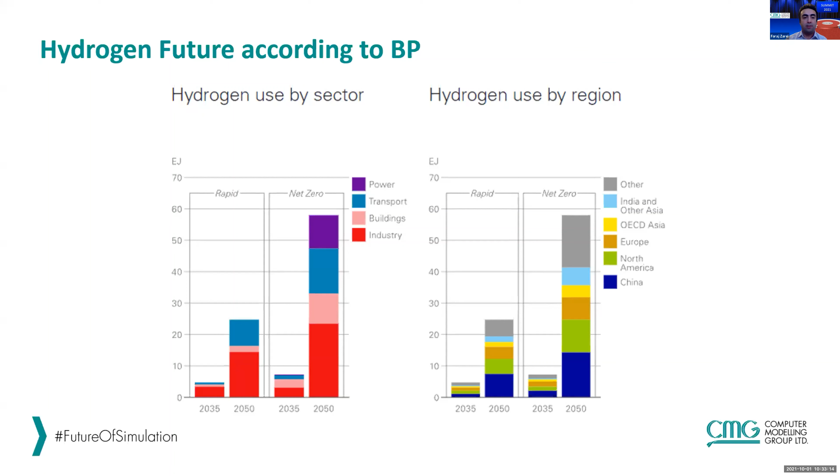So all of us are very familiar with the concept of gas storage. We have years of experience in terms of storing CO2 and methane, specifically in the underground environments. It's widely accepted that for any sort of large-scale, long-term storage, the only viable solution is underground storage. The four usual candidates are aquifers, oil deposits, gas deposits, and salt caverns.

A recent paper from Tarkowski gives a nice overview of the positives and, if you like, issues with each environment. While salt caverns are usually the least problematic, the big downside is that their volume size is quite restrictive, and the caprock can be quite delicate in salt caverns.

And the aquifers are not really reliable containers because the tightness of the caprock is usually much less compared to the usual environments when we have oil and gas deposits. So most of the time the only viable solutions are oil and gas deposits.

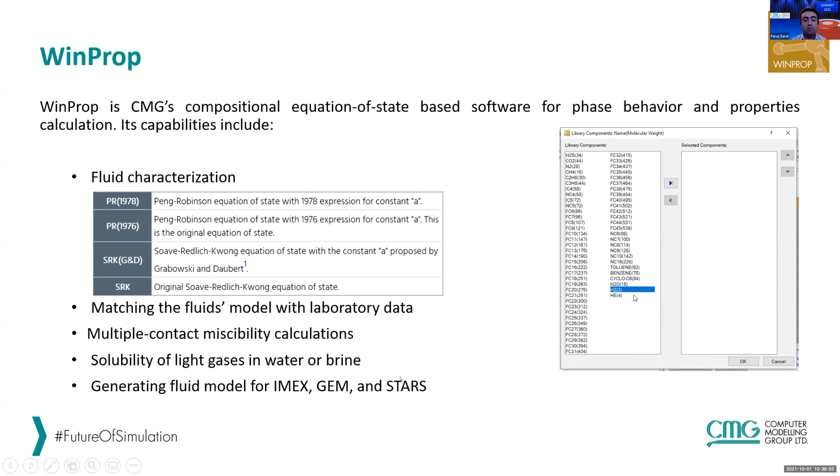Once you have the equation of state created in WinProp, if you have any lab data, any mixture, any regression or anything that needs to be done, you can export the PVT into any of CMG's simulators. IMEX is black oil. It's not really designed for hydrogen storage. So we have the choice of GEM and STARS. GEM is the compositional simulator, and STARS is K-value based. I'll go into the details of the capabilities of these two simulators when it comes to hydrogen storage.

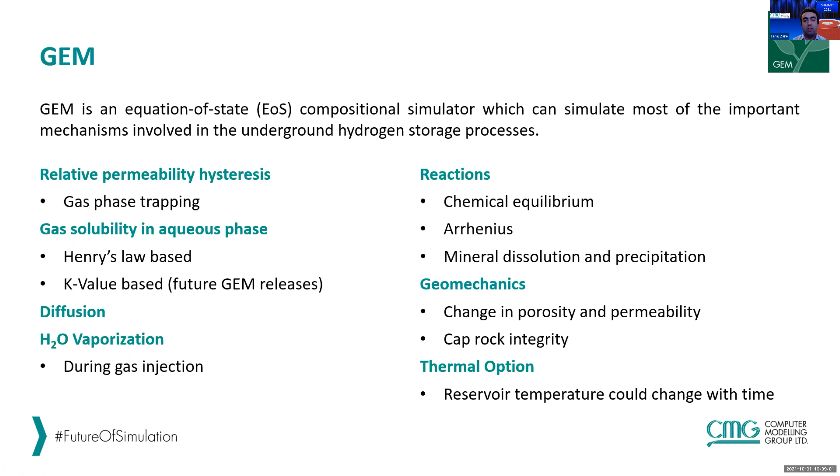So GEM, as I mentioned, is equation of state based, and it's been used for decades by the oil and gas industry. It has developed many advanced physics and complex process models that have accumulated over the years. For example, gas relative permeabilities, gas solubilities, diffusion, water vaporization. These are all processes that have been added to GEM over many decades, and they're all very much relevant for hydrogen storage as well. Over the next few slides, I'll give you a review of these capabilities in GEM and how they apply to hydrogen storage.

So we just had a detailed presentation on hysteresis. Just to remind everyone, hysteresis accounts for the effects of the changing wetting and non-wetting phase during the gas injection process. So WAG processes, when we alternate between gas and water, are a typical problem where hysteresis has major effects.

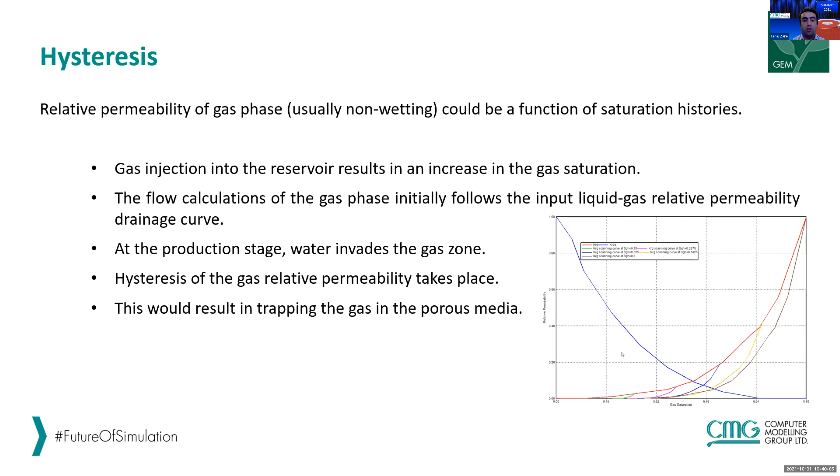Over the past couple of years, GEM has added quite advanced options in terms of modeling hysteresis. And because hydrogen storage is by nature a cyclic process, you inject hydrogen, you store it, and then you reproduce it, the same physics can also be applied to hydrogen storage as well.

Gas solubility. Hydrogen is not the most soluble gas, but usually it's accompanied by other more soluble gases like CO2 and methane. So it's very important that we take into account the solubility. GEM models solubility primarily with Henry's law. Henry's law basically dictates that the fugacity of gas in the water and the gas phase have to be the same.

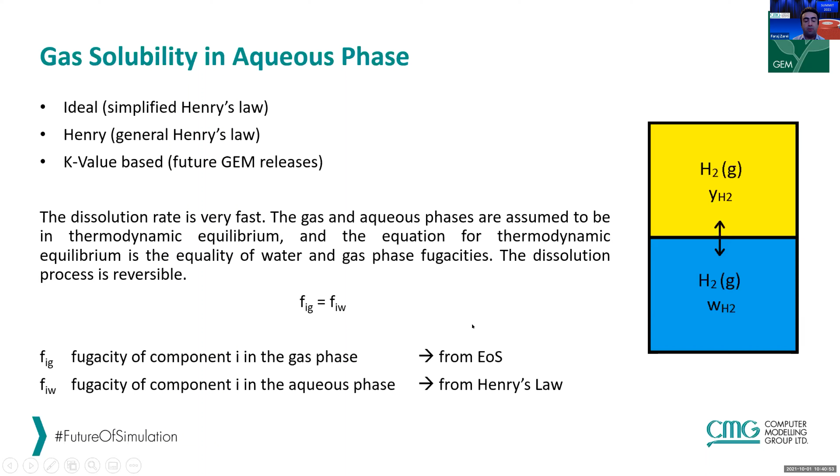So GEM internally calculates the fugacities. The fugacity of any gas comes directly from the equation of state, and GEM uses Henry's law to calculate the fugacity in the water phase. It's a rather simple equation. You have the Henry's constant for any pressure and temperature, which is measured in the lab environment, controlling the mole fraction of the gas in the water phase. This equation is always maintained, and that controls the amount of solubility.

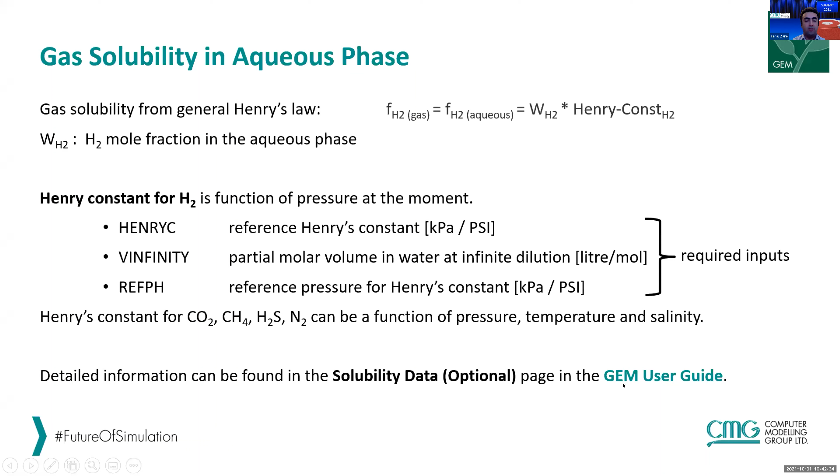As I mentioned, the Henry's constant is pressure and temperature dependent. Using these keywords, GEM can recalculate the Henry's constant entered for other pressures, so the solubility calculation is always valid for different pressure ranges within the reservoir. And for more soluble gases like CO2 and CH4, it has several built-in correlations that readjust Henry's constant not only for pressure, but also for temperature and salinity. If you need more information, you can refer to the GEM manual.

Other more standard properties, obviously the aqueous phase density. We have the simpler case of linear calculations, or Rowe-Chou, which is more advanced, taking into account pressure, salinity, and temperature when we are dealing with more complex physics, especially when features like geochemistry are involved. For viscosity, the Kestin correlation is usually the correlation of choice, because it maintains the consistency of the viscosity if you have pressure, temperature and salinity changes.

And for the gas phase density and viscosity, the density of the gas comes directly from the equation of state, most of the time Peng-Robinson, as I mentioned. And GEM also has the JST correlation, which maintains the gas viscosities in the simulation.

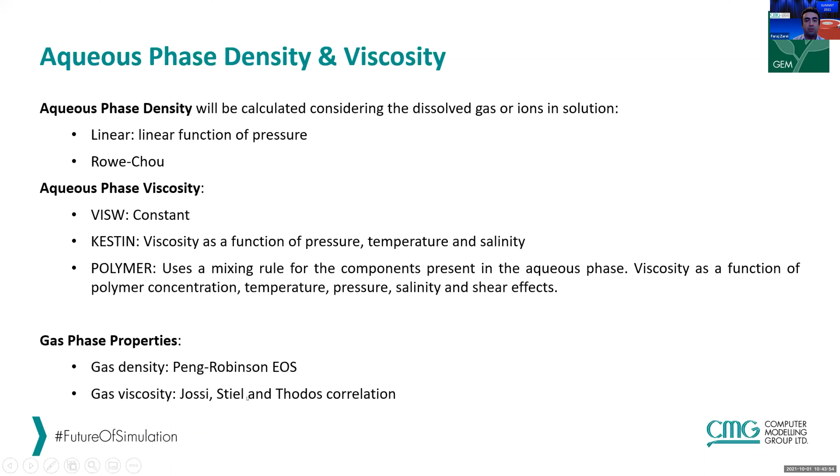Another major factor when we are doing injections, especially if the injection pressure and injection volumes are quite high, is the dry-out effect near the injectors. In such circumstances, the saturation around the injection well can dramatically drop, and that's controlled again by the fugacities of water in the water and gas phase. In this case, water has to enter into the equation of state, and GEM will take into account the drop in water saturation due to high rate injection near the injector wells.

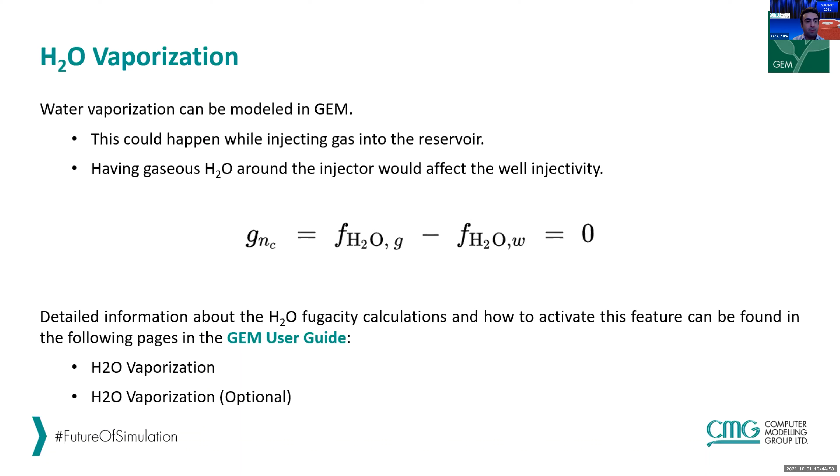In terms of reactions, we have two types of reactions in GEM. There are the chemical reactions, mostly aqueous reactions, things like CO2 dissociation. They are instantaneous, and they're controlled by a chemical equilibrium constant. The other type of reactions are Arrhenius reactions. These are rate dependent, and the speed of such reactions can be controlled by frequency factors and activation energy, so you can speed up or slow down such reactions to match any lab data if required.

An example of these Arrhenius reactions is methanation reactions, when you inject CO2 and hydrogen into the reservoir and you produce back methane. I'll have an example later on to show this one.

The other type of reactions are mineral reactions. These are much slower, and you have dissolution and precipitation involved with these reactions. Because we are dealing with solid components, they can change the porosity and permeability of the porous media, and that's obviously more dominant if you have geochemistry in the model, altering the properties of the rock.

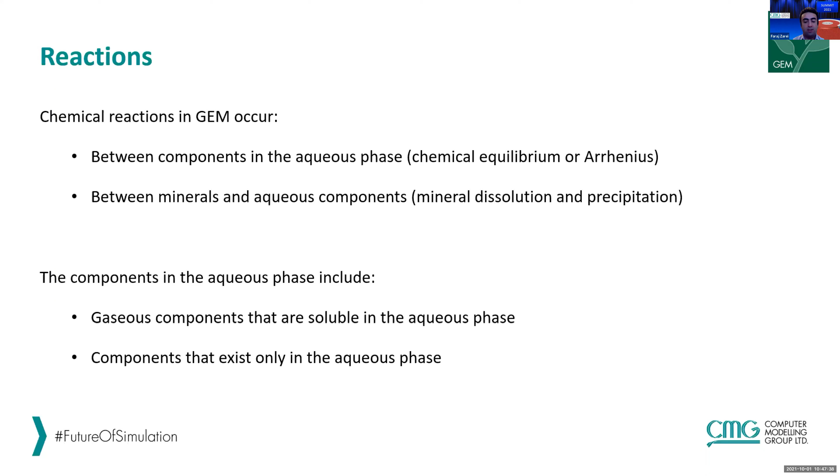The other major point is the thermal changes, especially for the hydrogen injection. If we are having large rates, the Joule-Thomson effects can create large temperature changes around the injectors, or if there are significant temperature differences between the injected fluid and the surrounding rock. The temperature effect has to be accounted for.

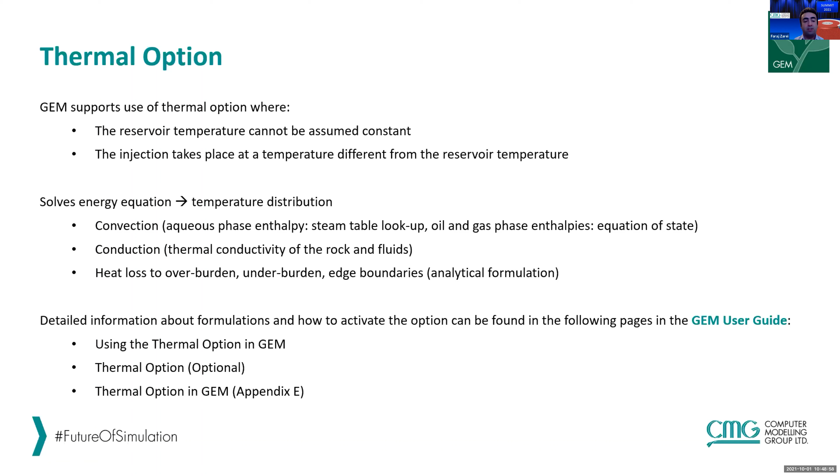So GEM solves the full energy equation, which has sections regarding convection, conduction, and heat loss to the boundary, overburden, underburden. All these processes and details can be captured in the full energy equation, and an accurate temperature prediction is possible using GEM.

Here I have a quick demo of how this works in reality. The scenario we're modeling is injecting a bit of CO2 for a couple of months as a cushion gas into an aquifer. You can see there's CO2 already in the reservoir; what I'm showing is the CO2 mole fraction in the water phase. So CO2 is in the reservoir and is dissolved in the water. We don't have any hydrogen and methane in the reservoir yet.

If we play this, in this plot the red dotted line is CO2 injected, and the CO2 that we produce is solid red. The blue is hydrogen injected, the solid blue is hydrogen produced, and the green is methane. As I mentioned, the methanation reaction converts the initial CO2 and hydrogen into methane. So as you inject hydrogen, there's methane being produced in the downhole environment, and you can see the hydrogen sits at the top of the structure.

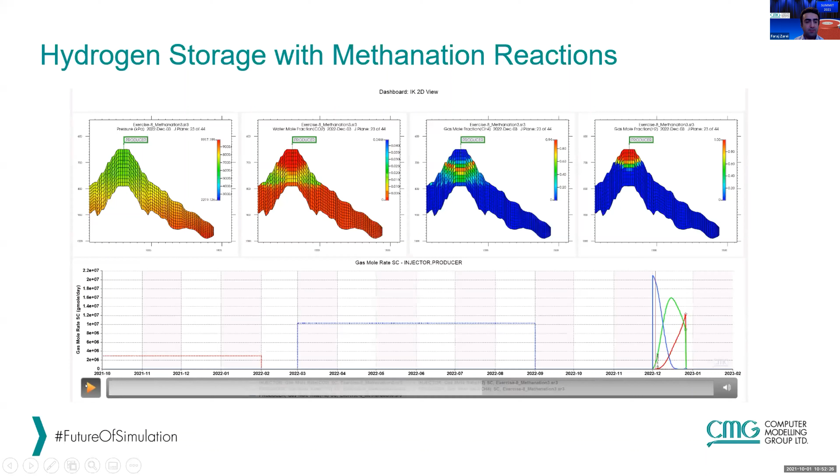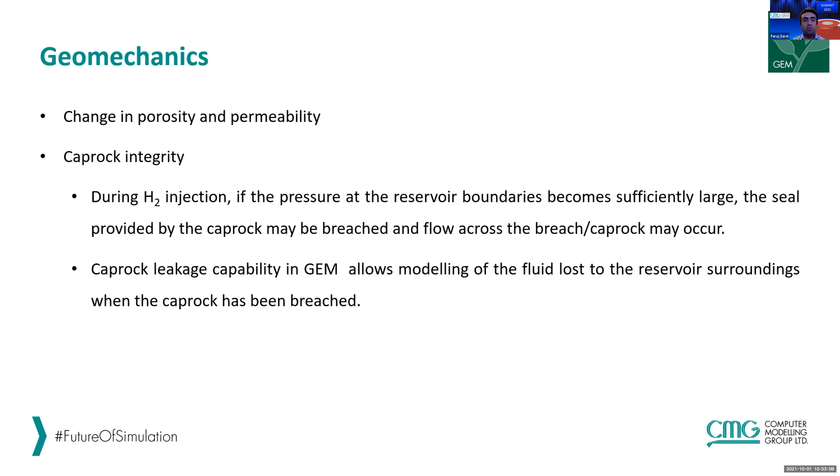Probably the most important factor in terms of hydrogen storage is the geomechanics. Hydrogen is an extremely small molecule, and it can escape from the caprock once there are the smallest cracks, pores, or permeability in the caprock. So having an accurate and reliable geomechanics model is paramount for any hydrogen storage success story. Full geomechanics is available in GEM.

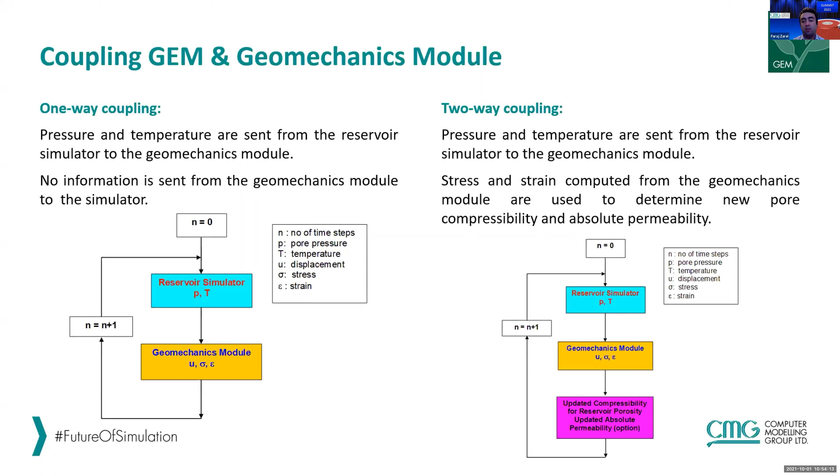You can do a simple one-way coupling, where the usual fluid flow runs in the background and sends information to the geomechanics module running on the side, so you can keep an eye on the geomechanics properties. Or, the more robust and accurate way is to actually engage these two simulators with each other. The flow simulator sends information into the geomechanics calculations, which calculate the strain, stress, and displacement. These parameters impact the porosity and permeability in the model, and eventually change the properties of the flow simulator.

So let's have a look at an example again. We have a gas storage example here which has two caprocks. If I start this animation, you can see we're only injecting in the bottom section of the lower reservoir. As we start injecting, the bottom hole pressure increases until there's the first crack, a permeable block in the bottom caprock.

Immediately after that, there's a gas escape from this smallest permeable block, which causes a pressure drop in the lower reservoir. You can see the BHP is dropping, and this is the amount of the gas that has actually escaped. The gas starts to accumulate on the top reservoir, and at some point even the top caprock also fails, and we have the gas escaping from both of the caprocks, which can be quite a costly failure.

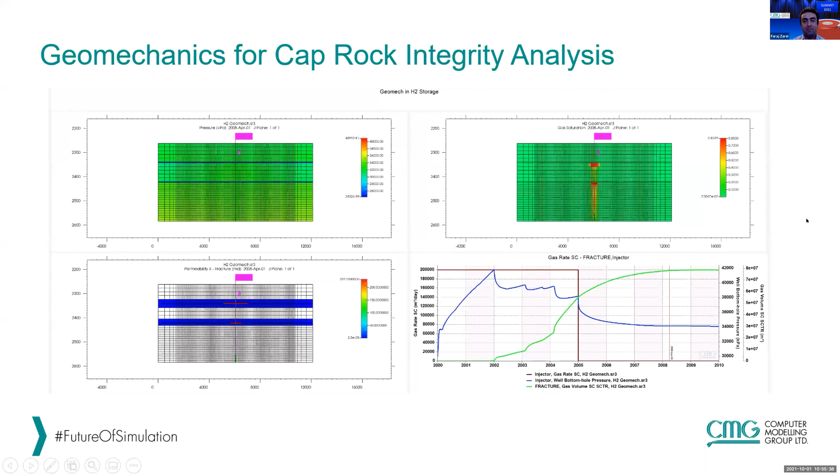So everything that I showed you so far was about GEM, but very similar capabilities are also in STARS. For those of you that are not familiar with STARS, it's another CMG simulator, which shares many of the same features. The big difference is that it's k-value based. So instead of putting the equation of state directly into the simulator, the tuned equation of state is used to create k-value tables, setting for STARS each component's amount in each phase at different pressures and temperatures.

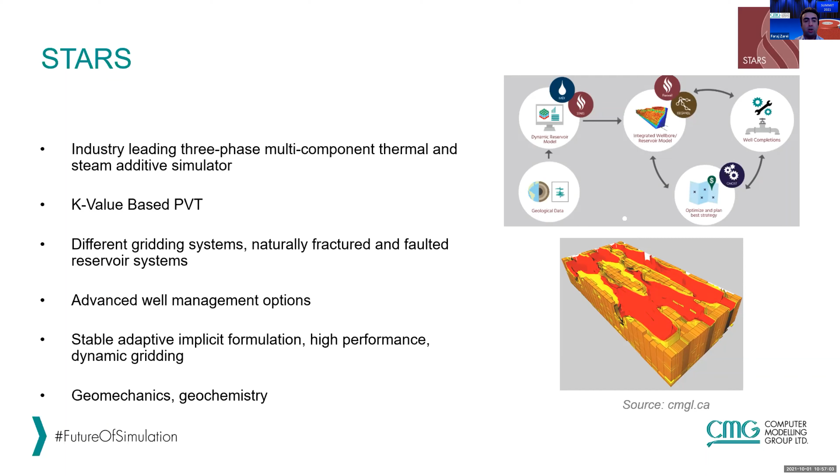The major advantage of STARS over GEM is that it has a FlexWell option, which is a fully gridded, fully coupled wellbore model that works alongside the main grid. So the fluid flow not only inside the reservoir but also along the wellbore can be monitored, and we can keep an eye on the properties of the incoming and outgoing fluid within the wellbore.

So this slide, which is my summary and conclusion slide, is that STARS is pretty much the same and offers the same capabilities. Everything that we can do in GEM that I presented is available also in STARS. But the positive side of STARS is that it has more flexibility in terms of reaction definition. Here the reactions can occur in any phase, and we have more control over the reaction rate. You can create nonlinear dependencies of the rate on third components in an exponential way, which can be used for modeling processes like bacterial growth, which are exponential. This can be closely replicated in STARS, but at the moment not in GEM.

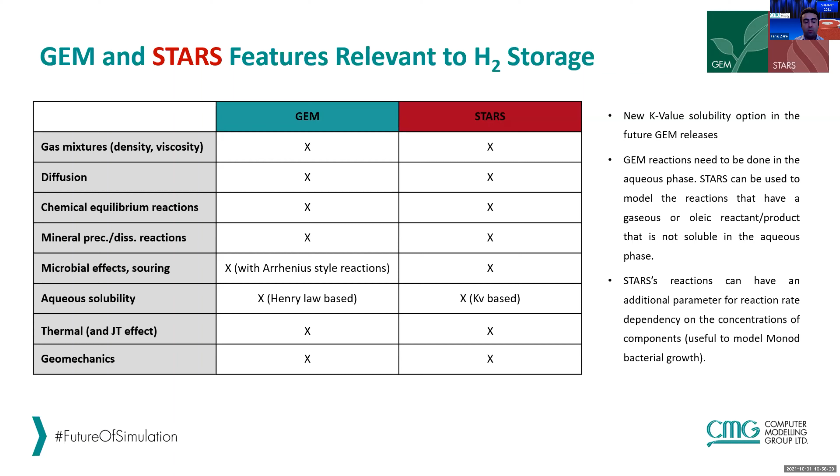Thank you, Faraj, for an interesting talk on CMG capabilities in terms of modeling hydrogen storage, not to mention using CO2 as a cushion gas, which Dr. Eric McKay mentioned earlier. Really happy that there are capabilities to help us look at clean energy resources. So one question, first of all, from Dr. Iraj Ershaghi from the University of Southern California. Thank you for this information about new CMG simulator capabilities.

Do you think storage of hydrogen is best done in semi-depleted gas or oil reservoirs, or should one consider saline aquifers? I would think if the purpose is avoiding carbon production by switching to hydrogen as a fuel, the storage in and production from such hydrocarbon reservoirs may be problematic.

Yeah, that's a fair comment, but as I mentioned, the big warning if you're considering aquifers is that they don't usually have a good sealing caprock, and that can have a major impact because hydrogen is very light and can escape through the smallest cracks. So for now, storing in oil and gas reservoirs seems to be the more reliable choice. And because those fields have almost all the infrastructure already installed, they should be much cheaper to use.